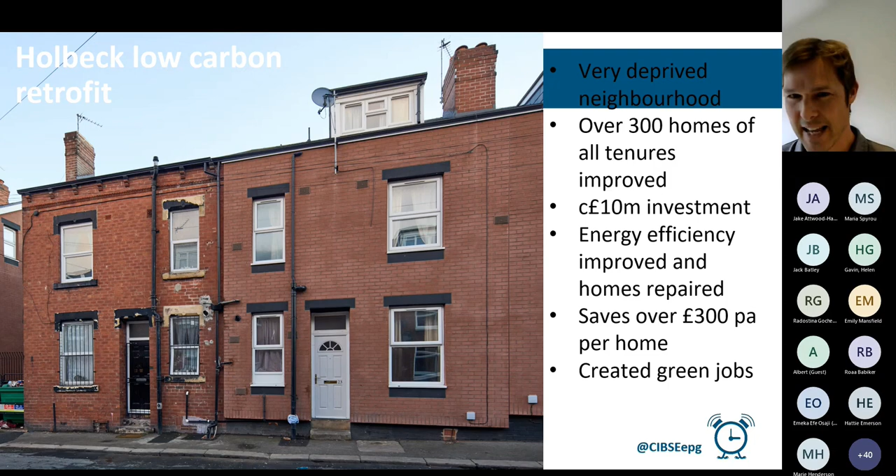Because I've been asked to focus on district heating. So next slide please. In terms of, that's a picture missing. That's very strange.

We've got 33 megawatts of backup boilers embedded in the network, but we're really only using those for backup when the energy from waste plant goes down for planned or unplanned maintenance. But we really have been leading the way. It's the largest district heating network outside of London, currently under construction.

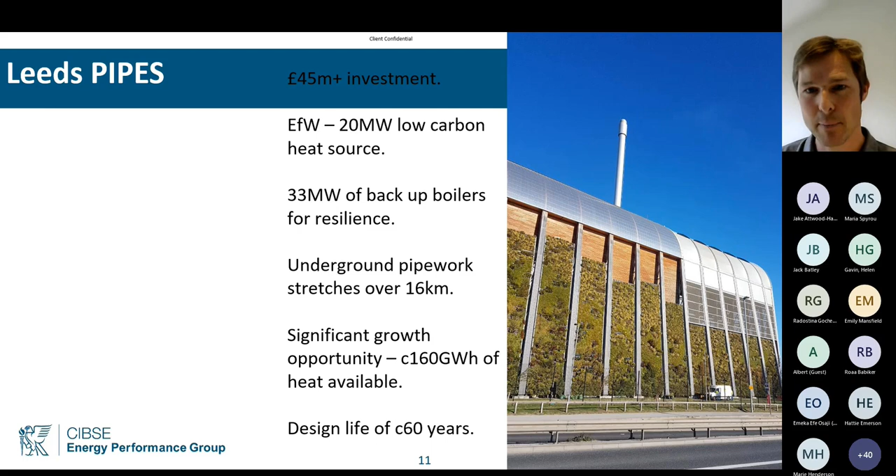We didn't want it to be district heating enabled forever, never producing any heat alongside the electricity production. So we took the opportunity as a council during the procurement to work closely with Veolia to make sure all the right preconditions were within the contract, so it's clear commercially how a network could be developed. So we were in a great place in 2017 to take the decision as a council to make our own investment and kick off a network.

It started with the network that runs up to the flats at the top of the screen. We connected around 2,000 council flats to the network as our phase one. It's very deliberate - we attracted some ERDF funding to change those from the underloved storage heaters within the flats into good quality, lower cost, lower carbon wet central heating systems.

That went very successfully. We then bid for some funding to build a second phase into the city centre, which completed last year. We've now connected 5 major civic buildings to it and are actively connecting other commercial buildings onto it. We've now got ambitious growth plans.

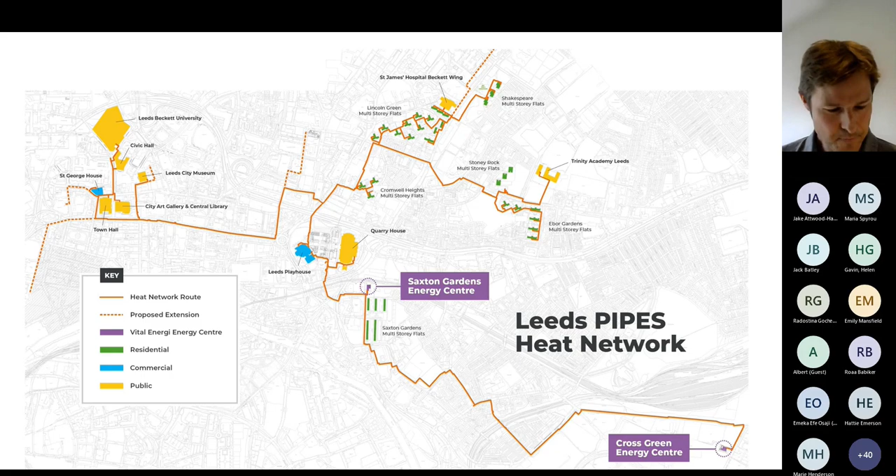If we look at the next slide, it's critical for our network that we get about 95% of our energy from the energy from waste plants. We're all very aware of the volatility in the energy markets at the moment.

We know we're going through a cost of living crisis - 10% across all goods is a very big impact. But because we're buying the vast majority of our heat from an energy from waste plant, which we have indexed primarily to RPI, we're in a very strong position to provide good value to our customers.

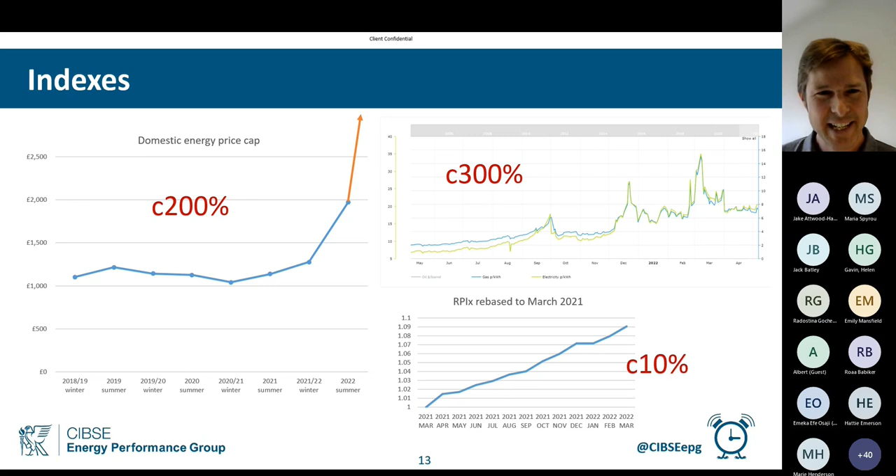So just to wrap up, we'll look at one more slide. We've got both commercial and domestic customers on the network. When we were initially pitching to our customers, it was very clear that customers wanted to see district heating being pegged to their current utility costs, to the gas index.

We know that a lot of these areas were, and still are, very highly deprived. So if we're able to at least provide a bit of basic need at an affordable rate, then we know that we're improving well-being for a large chunk of our population.

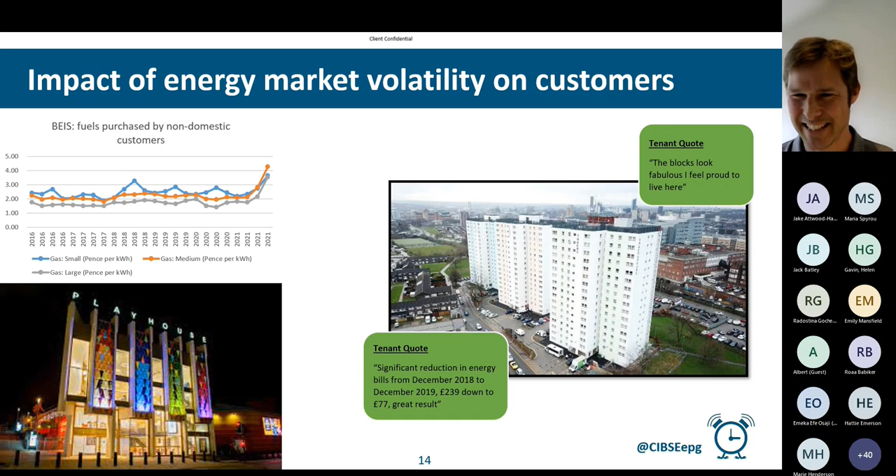Yeah, so my name is Brogan Watkins, and I'm a sustainability consultant working for Hoare Lea, and going to be talking today about Bragl, which is a pioneer in energy positive social housing development located in Bryn in South Wales.

Just a bit of background on Hoare. So Hoare are a team of engineers, designers, and technical specialists. We have over 150 years of history, and Hoare has around 11 offices throughout the UK and a growing presence internationally. We work with about a quarter of the FTSE 100 listed companies, and we provide a wide range of services to deliver sustainable, safe, healthy, and successful buildings. And we recently announced our framework going forward that's all about balancing the priorities of people and planet, which can often be slightly conflicting.

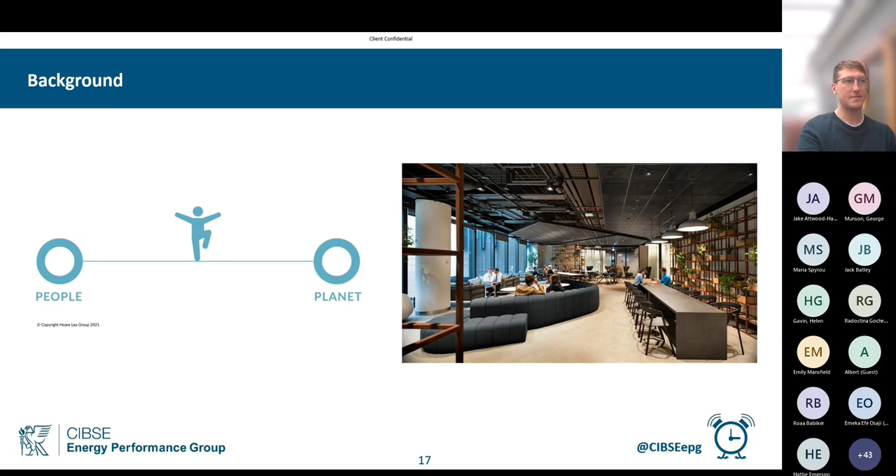So Bragl is a social housing development comprising 2 one-bed apartments, 10 two-bed houses, and 2 four-bed houses located in Bryn in South Wales. The project was funded by the Innovative Housing Programme, launched in February 2017. It's initially a 3-year programme with a budget of £90 million, with a target to build 1,000 affordable homes to accelerate the learning and understanding within the industry around low carbon technologies and sustainable housing.

The funding essentially pays for the innovative elements of the design, so looking at heat pumps, solar panels, batteries, and all of the supported projects must be independently performance monitored, where Hoare's building performance team comes in.

The concept is based on the SOLCER House. So the SOLCER House is the smart operation for a low carbon energy region, and it was built in Bryn in 2015 as a collaboration between the Welsh School of Architecture and some local energy modelling firms. It was featured in The Guardian as Britain's first energy positive house. It had an energy export to import ratio of 1.75, meaning it's actually giving out 1.7 times the energy that it's using, focusing on smart controls around solar energy to ensure you can export more energy than you import.

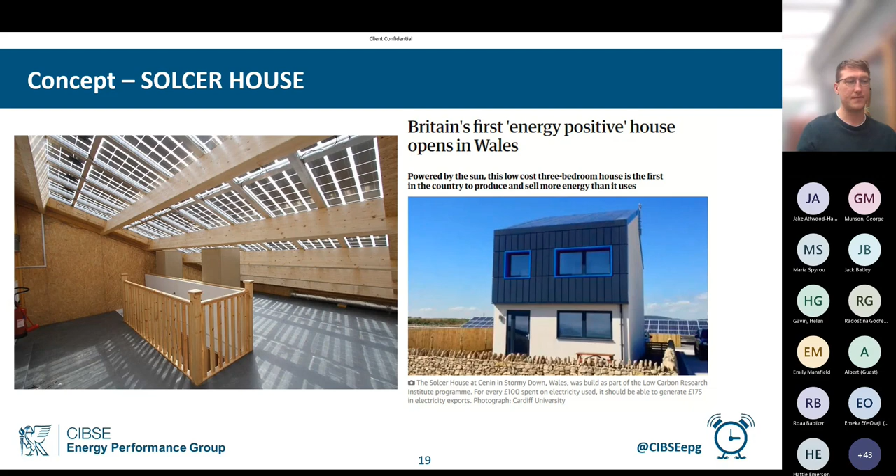So the technology behind this concept is all focused around passive design principles, which essentially means making as much use of solar as possible, making sure it's well insulated and really airtight so that heat you're generating doesn't escape easily. It uses MVHRs, mechanical ventilation with heat recovery, which passes the warm air inside the home over the air that's coming in to make use of that existing energy.

It has an exhaust air heat pump, which works on the same principle that air source heat pumps do, except it doesn't have an external unit. The condenser is found inside in a piece of ductwork where the air extracted from the property is passed over the evaporator to extract that thermal energy, giving efficiencies of around 300%. The exhaust air heat pump has an output of around 2 kilowatts, while usually homes need between 5 and 7 kilowatts. So for these to work in properties, you need really well insulated buildings with really good air tightness.

It also had built-in integrated solar panels on the roof, a battery to store some of the energy, LED lighting, optimized controls so using pieces of equipment when the cost of energy was lowest, and green tariffs, which we'll go on to later.

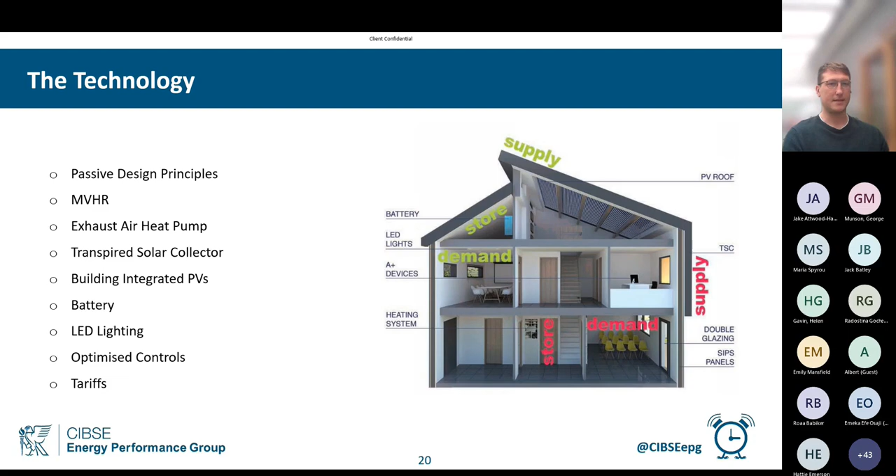The specification is here. You can see that the building fabric is really good. It beats all of the Part L compliance, which is key. It's not quite at what you would need to achieve passive house, but it's somewhere in between.

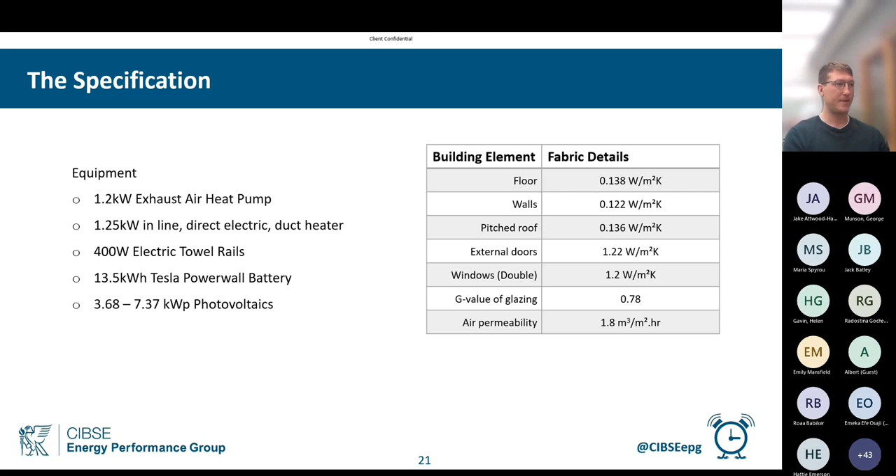And then you can see all of the details of the equipment that went in as well. The key one is the 400-watt electric towel rail, which once we've got the post-occupancy data, you'll see why the electric towel rail has quite a big impact on the overall annual energy consumption. We have existing data for the cost for social housing within Wales.

The guidance is that it should be £1,800 per metre squared. Bryn Bragl came in at £2,436 per metre squared, which is an increase of 35% for this pilot scheme. Speaking to the contractors and subcontractors, those additional costs are basically attributed to the improved building fabric, the building integrated solar panels, and the battery storage.

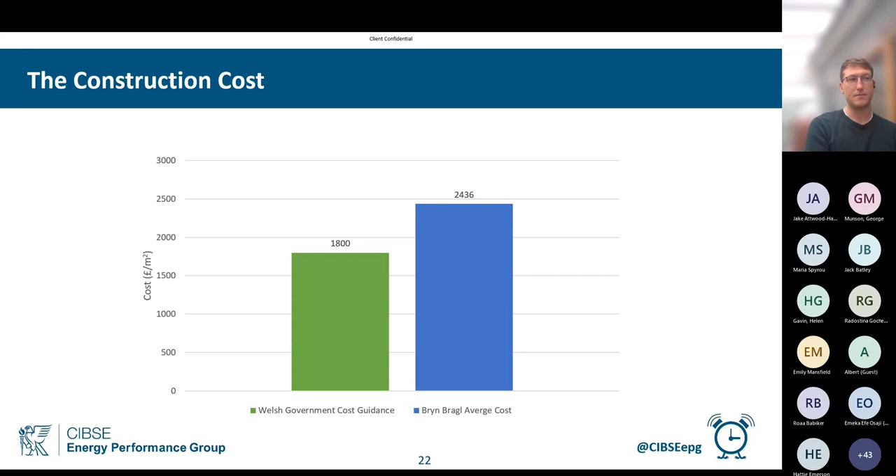But this cost difference is anticipated to decrease proportionally to the number of new technologies and new projects that we have in South Wales. And it'll be fascinating as the economy of scale is introduced, and as these developments get larger, how close that Bryn Bragl cost can get to the Welsh Government cost guidance.

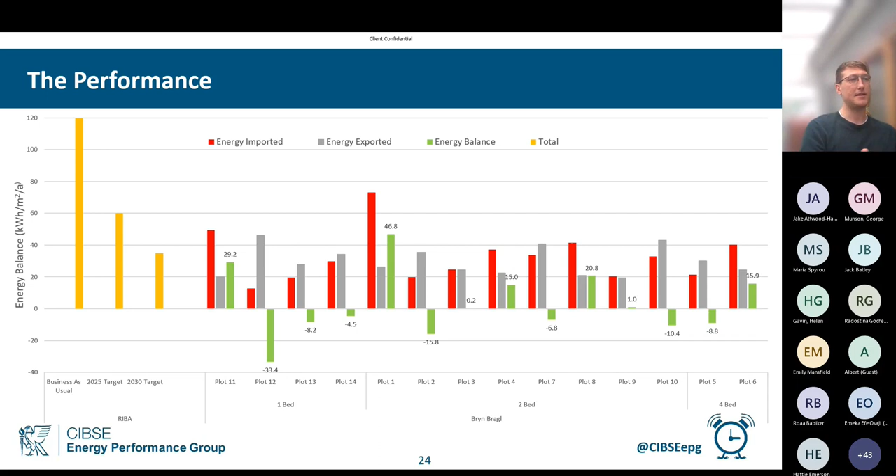We then have the energy balance equation. So you can see that the red is the energy imported, so that's taken from the grid. The grey is exported, so that's left over from the PV panels and storage that's sent back to the grid. And the green is the energy balance, so that's the remainder that you actually need and consume within the house.

All of the plots which are below the x-axis are at 0 energy positive, so they're actually sending out more energy than they're consuming. And there's no clear trend here between the properties as you categorize them per bedroom. It's fairly sporadic, but we think the biggest indicator of the performance and determination of whether it's energy positive or energy negative is really the unregulated load - how people are using the plug sockets, the cooking, the towel rails, for example.

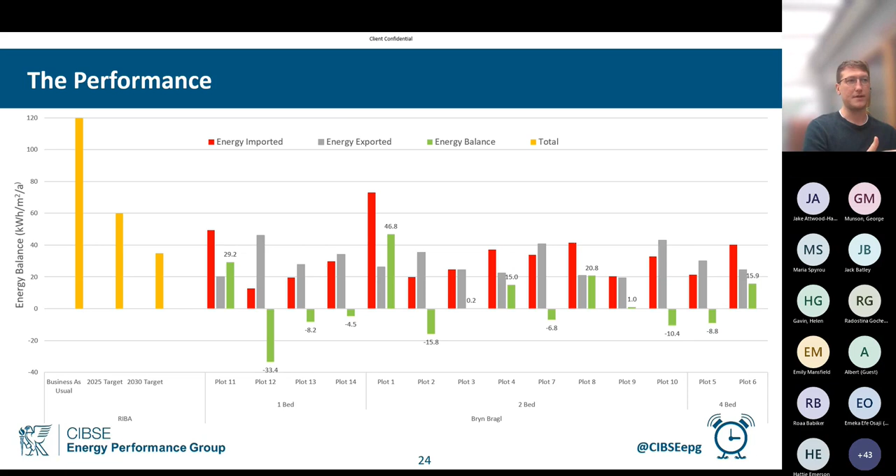We then have data on the costs. So essentially we've got a Tesla tariff - the Tesla energy plan, that bar's gone shooting up off the screen - but the Tesla energy plan is an energy tariff specifically designed for homes with solar panels and Powerwall. The Powerwall is the Tesla battery that's included in these properties, and it offers 100% clean electricity and huge savings.

So all of the green bars, which have negative numbers, correspond to the energy positive properties, and actually mean that the consumers will receive that payment from Tesla for last year's energy bills. So they're actually receiving money back to alleviate the fuel poverty.

The bar on the far left is the Wales fuel stress line, which is defined as 10% of the post-tax income spent on fuel bills - then you're in fuel stress. That's at £2,300 per annum, roughly, based on the average salaries within Wales. So with the exception of plot 1, even the negative properties are spending on average less than 1% of the average post-tax income. So the social benefits of all of that are untold.

And I'm delighted as well that the Welsh Government has since committed over £250 million towards 20,000 low-carbon homes to really establish Wales as a pioneer for scalable design solutions when it comes to energy-positive social housing.

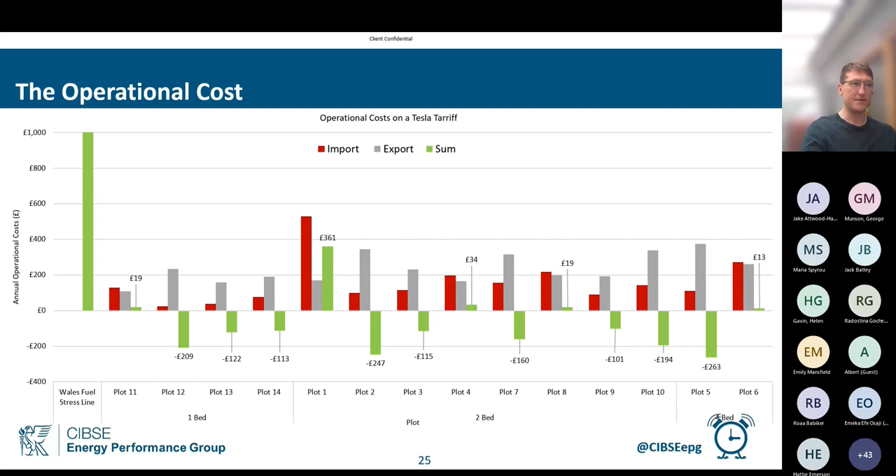The Built Environment Global Summit report was hosted by RIBA and Architects Declare in October of last year. It essentially identifies the best practice in built environment ahead of COP26, and formed part of a report which was ultimately presented to global leaders at COP26.

Bryn Bragl was identified as a best practice case study, and the report is available online if anybody wants to have a read of it. It's called the Built for the Environment report. Thank you very much.

Right, so I'm going to explain a bit about PAS 2035, looking at the kind of standards at the moment for retrofitting to relieve fuel poverty. My name's Lisa, I'm the technical lead at RetrofitWorks. We deliver a wide range of domestic retrofit across mostly the south east of England.

I've been heavily involved in PAS 2035, partly in the very early stages of development. I developed the original risk assessment for Greater London Authority, and then also in the implementation, rollout, and initial testing of PAS 2035. We've been shaking this out the last 2 years to try and get it as functional as humanly possible. A bit about the process.

The PAS is a bit unique in that it specifies a project management process as to what things need to be done, who needs to do what, in order for a retrofit project to deliver its intended outcomes. It lays out a series of steps, starting with really basic things like setting the intended outcomes of the project. So when we look at things like fuel poverty...

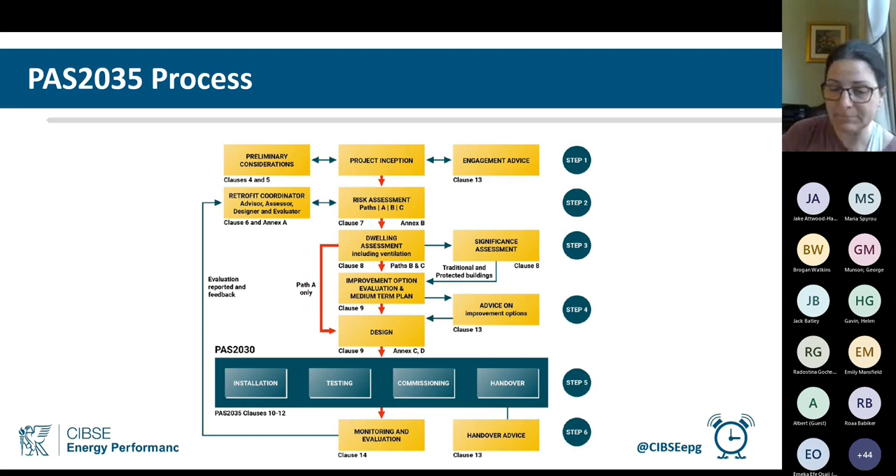So there's a number of things in practice which are important to be aware of. We have different roles defined in PAS 2035: assessor, coordinator, designer, installer, and evaluator. These roles in the different risk paths take on different levels of oversight over one another, different levels of coordination, and in some cases, a person can be multiple roles at the same time.

A really good example would be an MCS installer installing a heat pump - they are both the designer and the installer. Likewise with cavity wall insulation, and EWI, also both designer and installer. Ultimately that simplifies things from a liability perspective, because if something fails, there's basically a single person to blame for it.

The coordinator is there to oversee and make sure everything's done properly according to the right standards - that they're using the correct materials, putting things together in the correct sequence, and that they're all being sealed up and finished correctly.

A particularly good example recently was we needed to put a fan in a bathroom that just had one of those standard brick vents as an intake. We were going to use the same hole as an extract, and we said you can use that hole, just seal it up, put a proper duct through, and put the fan through that hole so you don't have to drill a new hole through the wall. We went to site and found they had taken the grill off and literally just set the fan inside the hole. We're just like, no. So we have to be able to oversee some of these things that you'd think are quite simple in practice, but end up being quite difficult to implement at the level of installation we're used to seeing in domestic retrofit.

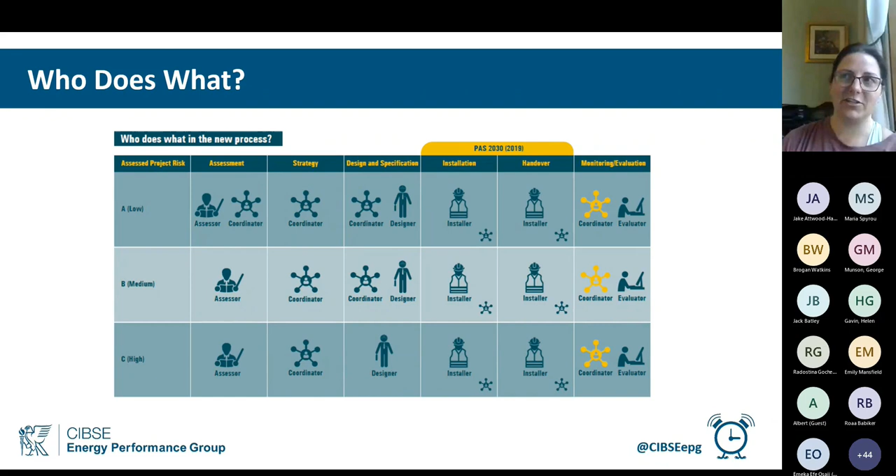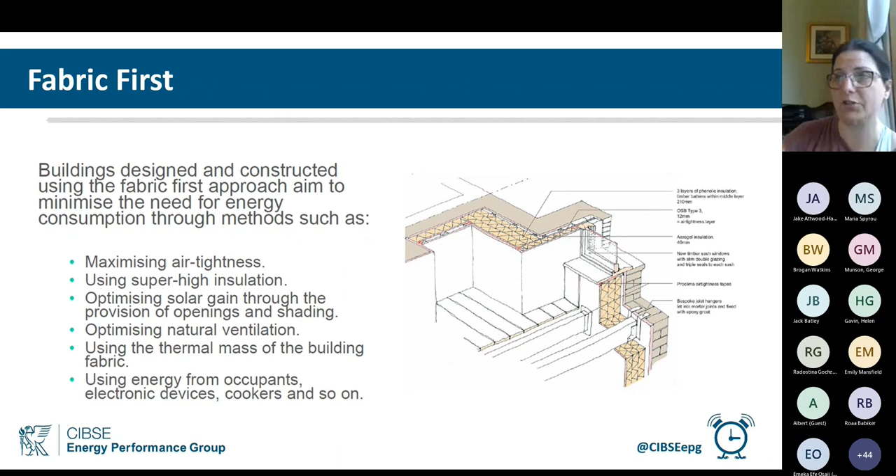The PAS specifies a fabric first approach to retrofit. They need to be looking at maximizing air tightness, using high levels of insulation where appropriate, optimizing solar gain, using ventilation appropriately, using thermal mass appropriately, and most importantly, resolving thermal bridges so we don't end up with condensation and mold risks on the inside of the property, which can cause air quality problems and potential health issues. It's supposed to be a whole house approach.

This is where we've been running into a number of problems with the existing funding that's currently quite prevalent in the UK. The LAD schemes up to Eco 3 - Eco 4 is a slightly different animal, and is about to come into effect quite quickly. So basically, up until now, we've been trying to implement this with schemes which had relatively low levels of funding, where it's actually quite difficult to get a whole house retrofit. If you're talking £8,000 to £10,000 of funding for a house, we're going to get a few windows and a front door out of that.

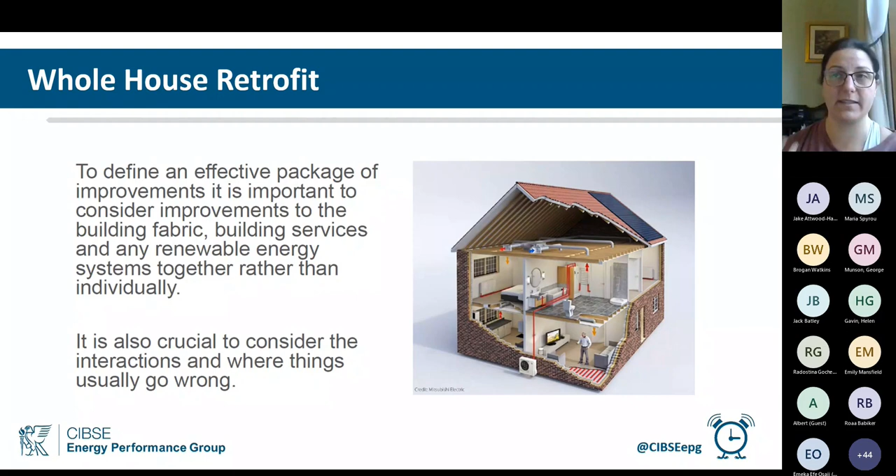We're not going to get a whole envelope, we're not going to get a whole new ventilation system. So we're struggling with a mismatch between what the standard requires us to do in terms of a whole house retrofit with fabric first, and what the funding is actually allowing us to do. We need to be doing all of these things at the same time ideally to get a coordinated solution and everything working correctly together - correctly sized, properly insulated, and made airtight in the right way. At the moment there's a big disjoint between what funding will allow us to do and what we actually need to do in properties, and that's making us struggle quite a bit in practice.

One of the key documents we're required to do under PAS 2035 - among all the various documents needed - one of the really important ones is the ventilation assessment. That's the one we've actually been struggling with the most in practice.

Somewhat luckily, this was initially put into PAS 2035 several years ago, because the original Part F, published up until December of this past year, stated that when you retrofit dwellings, you should make the ventilation no worse than the existing condition - the fact is most homes don't have adequate ventilation to begin with, they rely on infiltration. So a detailed ventilation specification was put into PAS 2035, knowing that in a few years Part F was going to be updated, and we would have a proper legal backstop to how we'd address ventilation in retrofit properties.

So the new Part F has come out as of December of this past year, and it comes into force in about a month's time.

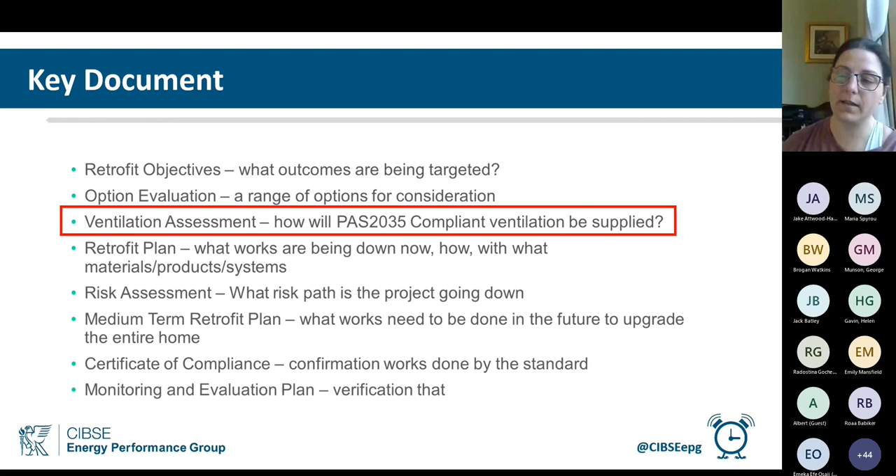It has some unique features, very well done. It requires that all retrofits include some improvement to ventilation in the form of extract fans in the wet rooms. So if you're working in a house that has no ventilation at all, just a recirc fan in the kitchen and open windows in the bathroom, that won't fly anymore under building regs. It has to be upgraded, the fans have to be put in. That gives us a really solid legal backstop so people can't opt out of fans, which at the moment is what's happening - people are quite reluctant to accept them. So we'll have fans in a more mandated position in about a month's time.

One issue we're sympathetic to when working with residents is, if their funding only covers a door and a couple of windows, the last thing they want is for us to punch 2 or 3 holes in their walls to put fans through if they didn't already have them. Because it's not lost on them that if we punch holes in the kitchen and bathroom for fans but only replace their front door, we've actually made their home more leaky than it was to begin with. That's a real problem given the funding situation - it's not covering enough of a retrofit to make the ventilation upgrades worthwhile. So that's a bit of a struggle at the moment, and even under the new Part F, that's still going to be a problem.

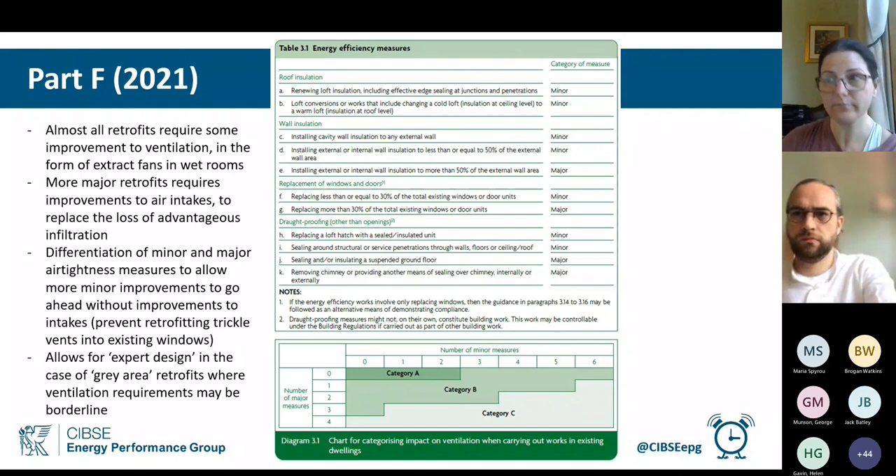Hi everyone, my name is Billy Cliffen. I'm a senior consultant at Turner & Townsend. We have a sustainability team, and within that I sit in the housing team. Our main support for the social landlord sector is helping them retrofit their housing stock, largely focusing on achieving decarbonisation targets, but also grappling with fuel poverty and trying to mitigate that risk.

So I'll be talking today about two key programs that we are delivering. The first one is the Retrofit Accelerator Homes program, that's a GLA funded program. And the second one is the Social Housing Retrofit Accelerator program that we're delivering with BEIS. Both are retrofit-led programs that take different approaches and work with the sector in different ways to mitigate fuel poverty.

So the brief to me was, what are some of the long-term solutions to fuel poverty? I think we don't really need to sell retrofit as a solution in terms of targeting the leaky and old housing stock that we have in the UK. When I talk about retrofit, I mean taking a fabric-led approach to reduce the heating demand in properties, and also preparing them for low carbon heat and power. Retrofit is clearly the best way to mitigate the risk of fuel poverty and protect residents from rising energy costs. But really what I want to talk about is the challenges around delivering retrofit at scale.

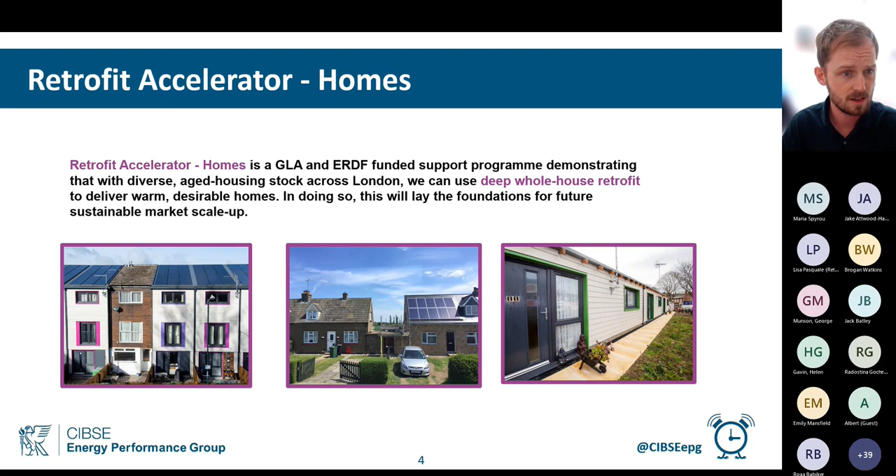I'm not going to do a deep dive into what Energiesprong is, but I thought I'd cover some of it. It's essentially a whole house retrofit project that provides a guaranteed monthly cost and comfort package for residents. After delivery, residents pay an energy service plan equivalent to their previous energy bill, and that plan repays the capex cost for the landlord. Retrofit has struggled in the past because the landlord invests all the money but doesn't see a return from that investment, so they've struggled to develop a funding mechanism. Energiesprong targets that by providing long-term performance in energy consumption post-delivery, helping to provide this fixed monthly cost that can repay the capital works.

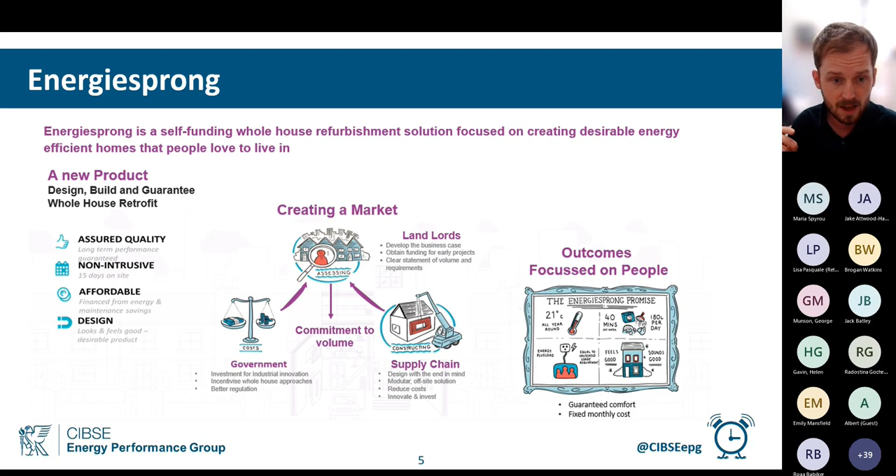So what the Retrofit Accelerator Homes program is doing isn't just delivering Energiesprong, it's creating a market for it - working with landlords to help them develop the business case, and working with the supply chain to develop modular offsite solutions that will help to industrialize and scale up, and commit to the volume we'll need to see to deliver more of these schemes. That volume helps bring the costs down in the long term. In 2018, the average Energiesprong cost for a whole house in the UK was around £80,000, and the target is to bring that down to £40,000 by 2025.

This really significantly brings the heating demand down, and the target is about 40 kilowatt hours per meter squared per annum for the heating demand. Also, low carbon heat comes in with an air source heat pump. Although the Energiesprong model is actually technology agnostic, so it doesn't have to be necessarily a heat pump, but that's a typical solution that we see.

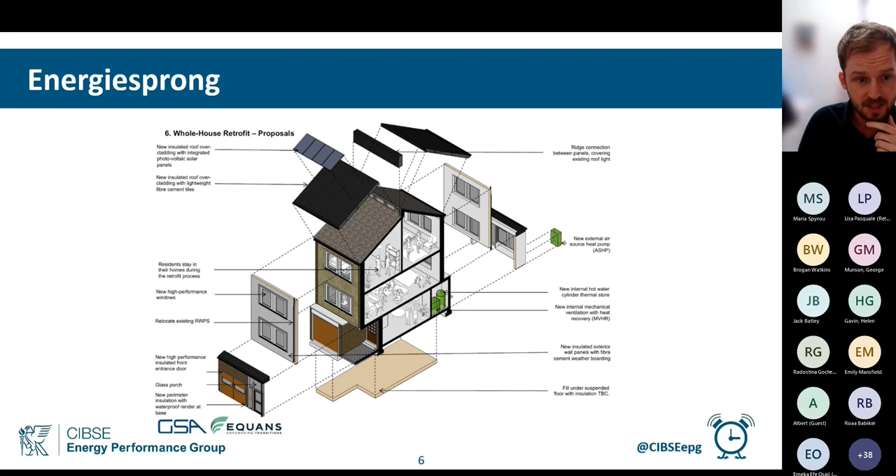Next slide, please. This is one of the Energiesprong projects that we've delivered with the Retrofit Accelerator Homes programme in London. You can see the difference there from top to bottom.

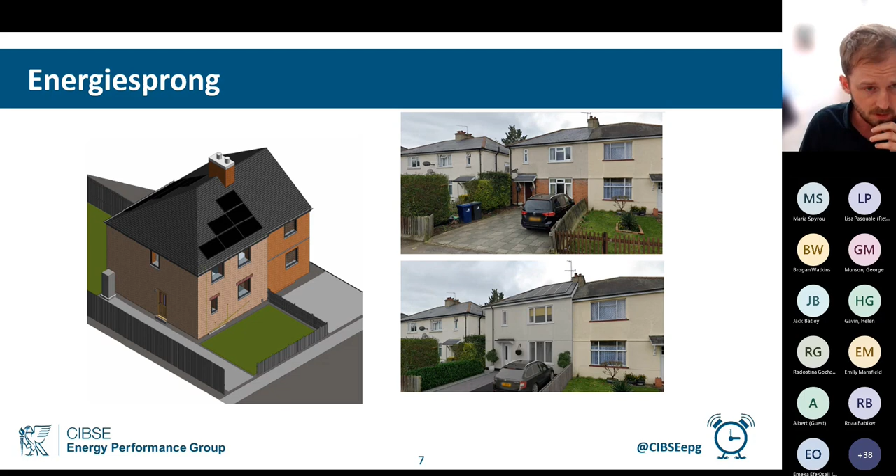Next slide, please. So I'm going to talk about the second programme now that Turner and Townsend are delivering, which differs quite a lot to Energiesprong. The principle is the same, it's focused on retrofit, but rather than a whole house programme, this is the Social Housing Decarbonisation Fund, which is a 3.8 billion funded programme to be delivered over 10 years.

That's funding from government, promised in the Conservative manifesto. So the SHDF programme focuses on much more of a phased approach to retrofit, because there is clearly a funding challenge both on the landlord side and the government side. Whole house retrofit isn't always feasible, it's not always possible, and it's certainly not always affordable.

So some landlords are mixing their portfolio approach to retrofit, doing whole house retrofit where they can, which isn't a deep one hit, but in other properties doing this phased approach. That's what the SHDF programme focuses on.

So it targets properties with EPCs lower than D, so E's, F's and G's, and it looks to bring them up to EPC C and achieve a heat demand target of 90 kilowatt hours per meter squared. So it's largely looking at external wall insulation, loft insulation, new windows - this kind of fabric first approach. But also what Turner and Townsend deliver is the Social Housing Retrofit Accelerator Programme.

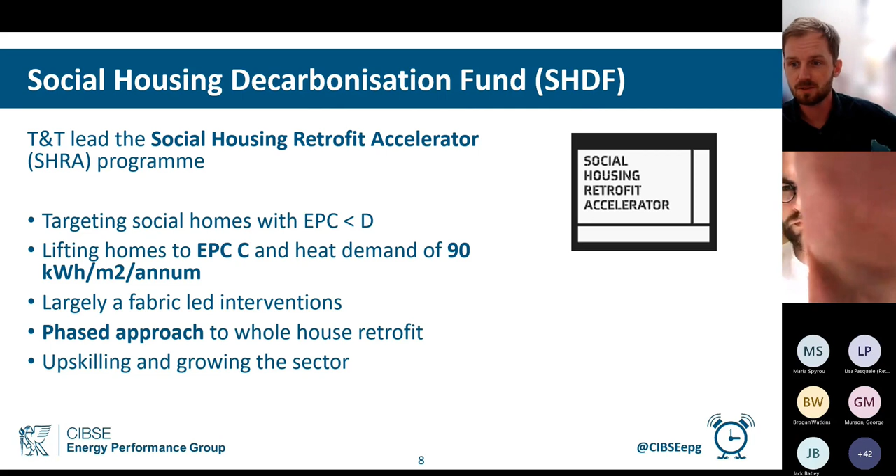I thought I'd just ask a couple of general questions to the group as a way to kick us off. First off, and this may be a little unfair to anyone that hasn't done a lot of quite dull reading over the last couple of days, but I was wondering, with the Queen's speech, there's a lot of new announcements coming out around planning. Particularly, thinking with the work that we're trying to do, what was most interesting to me was this idea about street votes and setting separate planning rules for different streets, which may allow a little more flexibility in terms of retrofit or overcladding or new storeys or those types of things to buildings. I was just wondering if there was anything anyone saw in the Queen's speech that pointed to some kind of change in what we're talking about here.

Should I direct that, or should I take that as a not very much? I appreciate there wasn't a lot of detail in what was released so far.

So my background is from more architectural design than many of you. I'm working for a council housing developer in Newham, and we're finding that actually the 60s and 70s blocks are in some way more valuable to us, because as we're seeing in some of those energy retrofit examples, you have a nice flat facade, it isn't listed, and people won't object. You can quite easily and cheaply insulate these properties. Whereas with Victorian solid wall properties, like we have in Newham and you have in Leeds, the planning system and this new push towards beauty, reconfirmed in the Queen's speech, can actually be something that's really hindering us. Do you have any interesting examples of that, or comments on how we get around those issues?